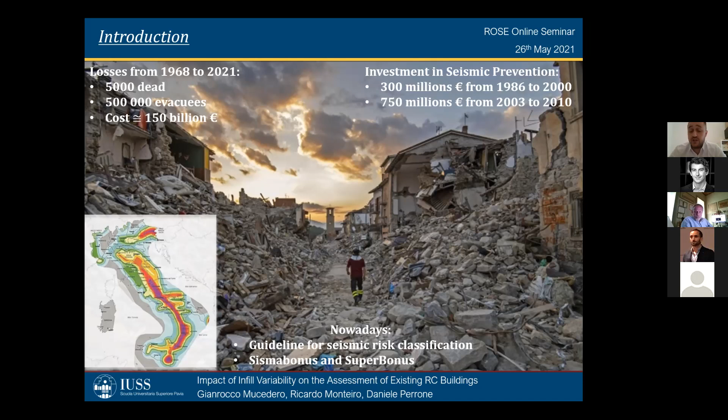I can say it is a unique opportunity to improve the seismic safety of existing Italian buildings. If we take the cost of the L'Aquila earthquake as an example, we have 10% of losses related to structural elements and 90% to non-structural elements.

If you look at the disaggregation of losses, 47% are related to infill walls and partitions, 16% to plumbing and electrical systems, 22% to windows and doors, and the remaining portion to other elements. In particular, damage to plumbing and electrical systems, but also windows and doors, is generally related to in-plane and out-of-plane damage of infill and partitions.

This means that masonry infill has a strong impact on the global and local behavior of structures, but is also important in terms of economic losses.

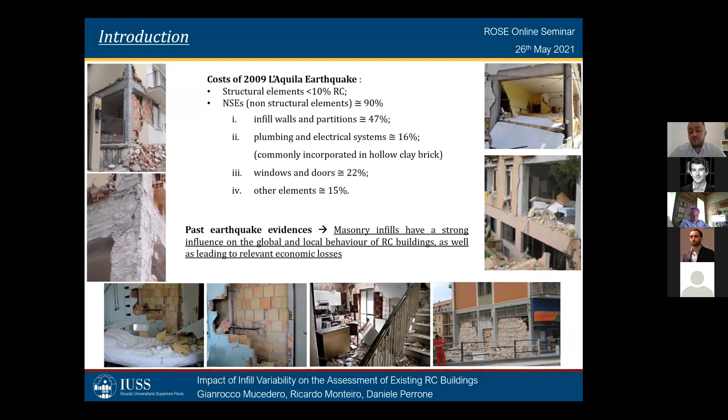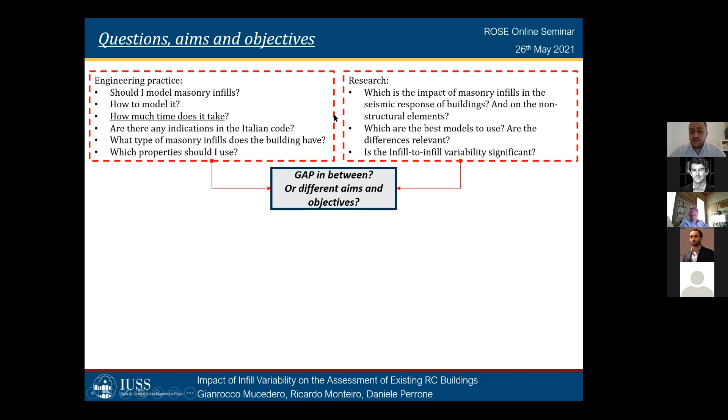When I started working on this topic, I asked myself different questions related to two directions: engineering practice and research. The questions are quite different, and the next question was whether there is a gap between them, or different aims and objectives. I think the answer is in between, and the research we are doing in this period is going in this direction.

So trying to fill this gap and support the engineer with indications on how to model the infill and which masonry infill they could expect in buildings, but also to quantify the impact of masonry infill on the assessment of existing buildings. We are going to see something related to material properties, modeling, and also a case study building portfolio.

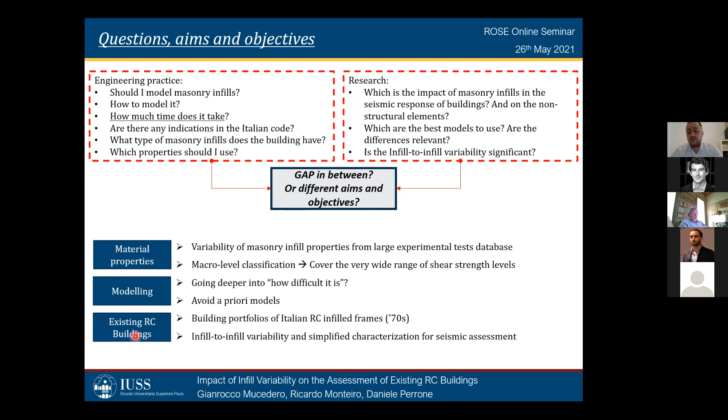So the idea is that for an engineer or a researcher, it's quite difficult to guess the correct masonry properties of an infill to be used for the assessment of existing buildings.

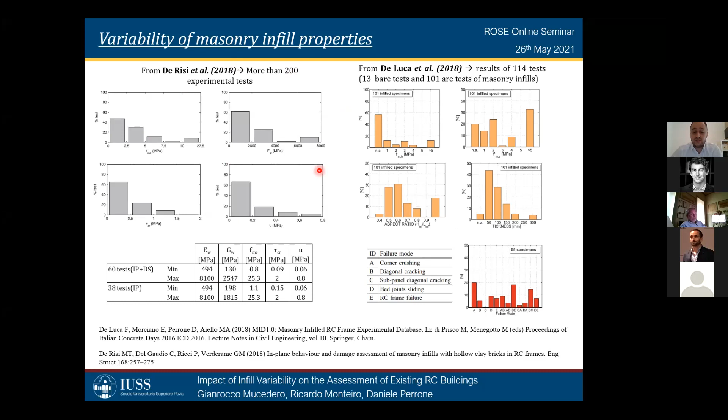So we decided to use this research methodology, and in particular to select 5 different masonry infill typologies, based on a distinction in stiffness and strength.

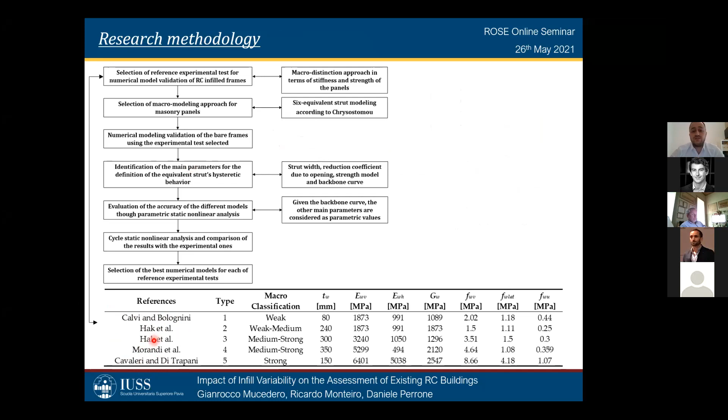Then we used a macro modeling approach for the infill frame, and we moved to a validation of the numerical model for the bare frame, and then we focused on the infill frame.

There are different parameters to define the correct hysteretic behavior of the infill, and then we were able to define, for each masonry infill, the correct models to represent that specific masonry infill.

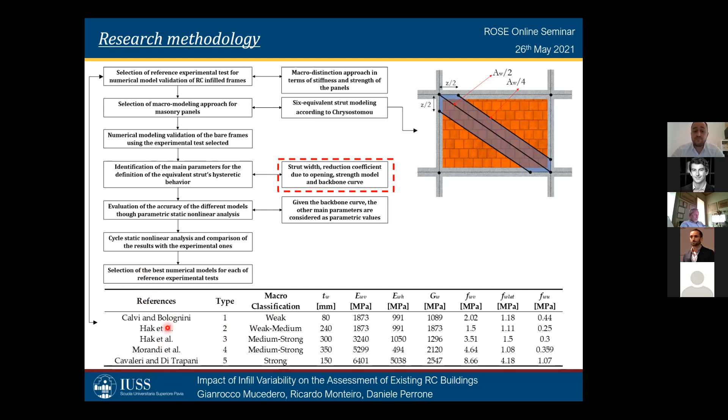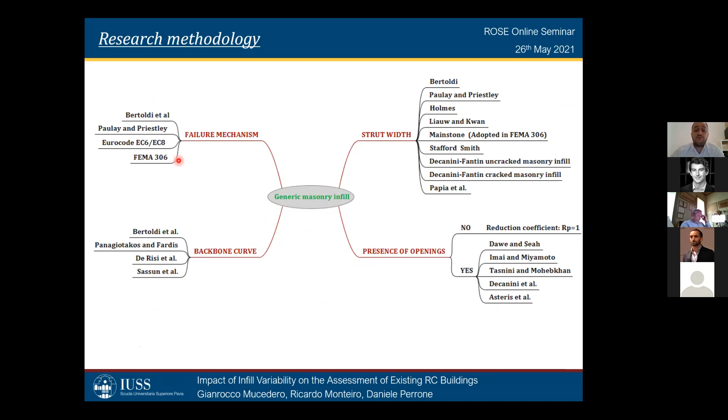So, as I said, given a masonry infill, there are different properties to be defined for the characterization of the hysteretic behavior, such as the strut width, in case of openings how to reduce the stiffness and strength, the failure mechanism, and the backbone curve.

So we start with the modeling approach of the infill frame. In particular, we decided to use a beam with hinges element, using both the flexural behavior and the shear behavior of the RC element, aggregated in one section at the end of the element.

In terms of beam column joints, we used this tube backbone curve, and the modeling approach was to use a zero-length spring coupled with a rotational hinge. This model was already validated by O'Reilly and Sullivan.

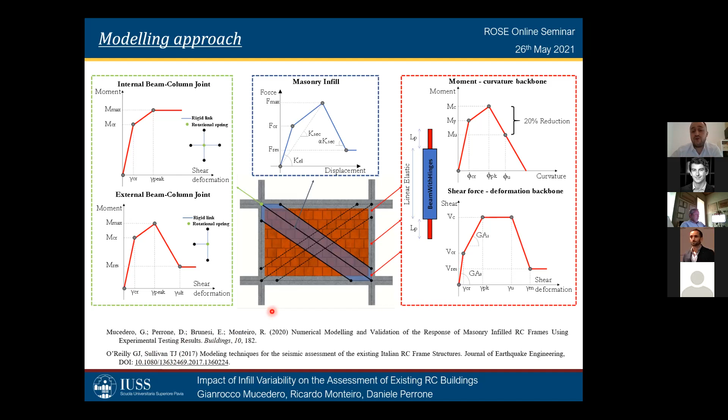But before starting the validation of the infill frame, we decided to further validate the numerical model, starting from the gravity load design - this is the test tested by Verderame et al. in 2016.

This is a gravity load design, so the frame is poorly detailed, and in particular the assumption of rigid joints gives us results overestimating the base shear of the frame.

Whereas the correct approach was to introduce a shear spring with rotational behavior, and the results are in quite good agreement with the experimental test.

Then we move to seismic load design frames. In this case, this is again a test of Verderame. On the right, there is a test of Morandi et al. in 2018.

Since both of these are designed for seismic load, the detail of the joints is quite good, and the assumption of a rigid beam column joint gives us results that are quite in good agreement with the experimental test.

So then we move to the macro modeling approaches of the infill, and in particular there are different methodologies, starting from micro modeling or macro modeling approaches. We just focus on macro modeling approaches, starting from the simplest one.

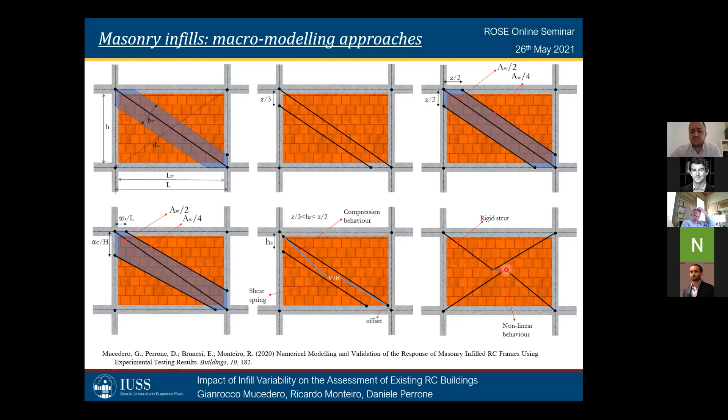One of the latest models proposed in literature is the one by Furtado, which consists of two rigid struts in each direction, connected to an element located at the center in which the nonlinear behavior is concentrated.

To define the maximum strength of the panel, it depends on the relative mechanism involved, and there are different possible failures, such as shear sliding, corner crushing, diagonal compression, and diagonal tension or cracking.

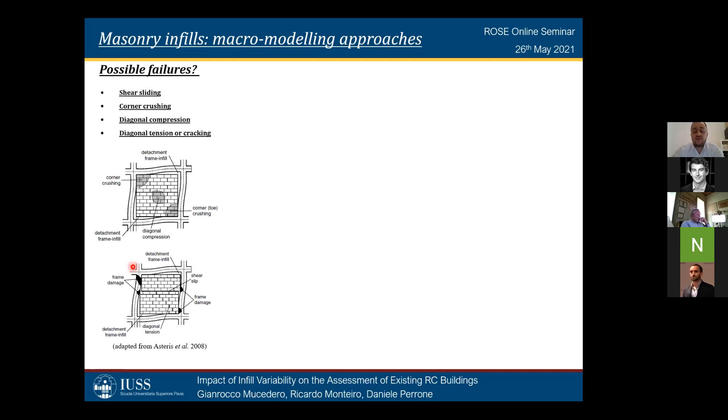I'm not going into the detail of all of these failures, but I can say that they are quite important when we go to define the models that should characterize the maximum forces in the panel.

So these are just some of all the possibilities that we can find in literature, and I can say that among all of these, only the one by Bertoldi is able to consider all of these possible failures.

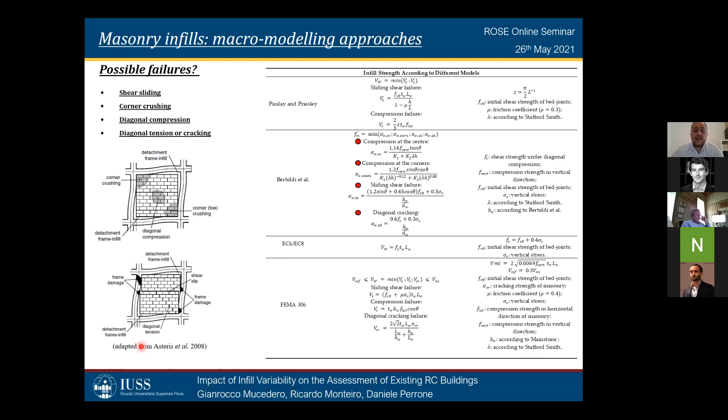Although it doesn't mean that this is the correct one for all masonry infill typology, and this is the first source of uncertainty in the model.

Then we move to define the strut width. There are different methods: those based on the lambda parameter, which defines the relative panel-to-frame stiffness, such as the one proposed by Stafford Smith and another by Mainstone, or methods based on a prefixed value or a range of the ratio between the strut width and the strut length. This is another source of uncertainty.

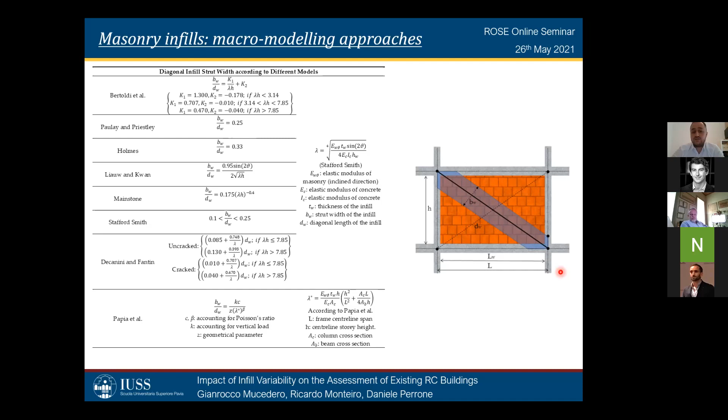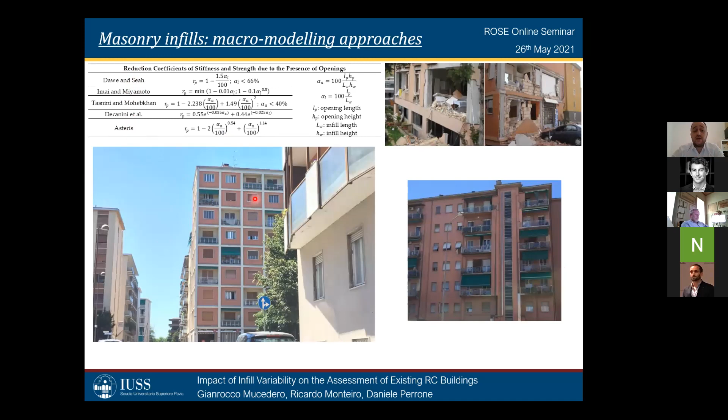Often in existing buildings we also have openings, which means we have to take them into account. Generally, we reduce stiffness and strength. There are different formulations here, and the idea is to reduce the stiffness and strength based on a percentage related to the ratio of the area of the openings to the total area of the panel.

At the end, we are able to define the strength, the backbone curve to assign to the strut. We used all of these to try to understand the reliability of the model: the one of Bertoldi, which is a quadrilinear backbone curve, where the main parameter is F max, based on the minimum of the four possible failure mechanisms of the infill; and the one of Panagiotakos and Fardis, also a quadrilinear backbone curve, where the main parameter is the cracking strength.

This backbone curve is based on 10 experimental tests on infill frames with horizontally hollow clay bricks. There are also two novel approaches: the one by De Risi, which is a modification of Panagiotakos and Fardis in terms of maximum forces — the residual is zero in this case — and also in terms of stiffness, changing the secant stiffness and the softening-to-peak stiffness. The last one was proposed by Sassun et al.

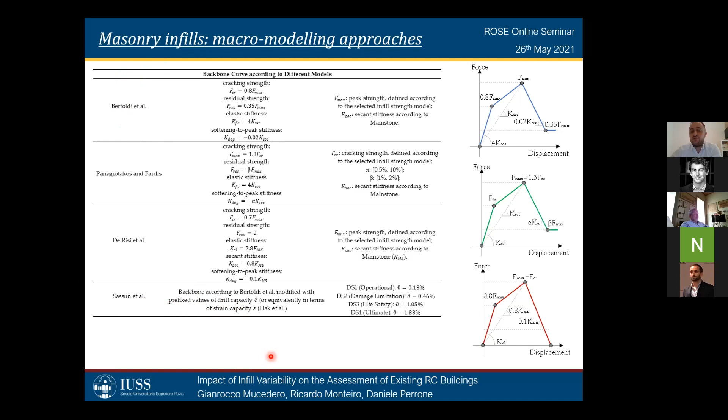In this case, the strength model is based on the approach of Bertoldi, but with a prefixed value of drift capacity for each limit state.

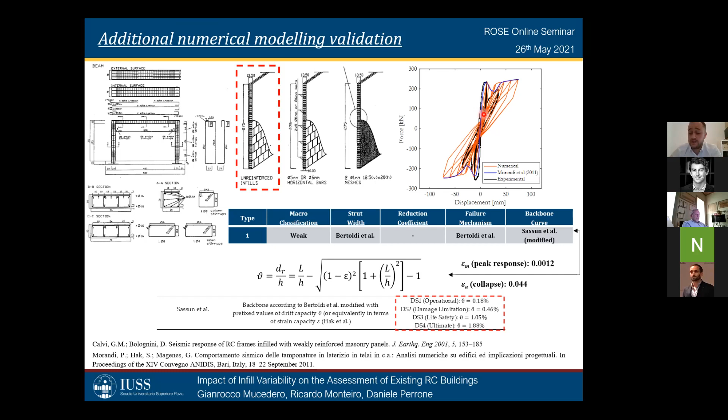Then we try to also check the reliability of the model in case of openings. The experimental test again is the one of Morandi in 2018, and the peculiarity of the test is the size of the openings. In particular, the size is equal to the size of the panel. This means that this masonry infill is completely separated into two portions, and maybe for this specific case, the best approach is to use just one strut for each portion, as also demonstrated by the damage pattern at 1% of drift.

Still, although this consideration, we decided to use the same numerical model that we use for the completely infilled frame, but accounting for the reduction coefficient. The best approach in this case was the one of Decanini that gave us results in good agreement with the experimental test, although in this case, the scatter with the experimental test is more than before for the other validation model.

So at the end, we propose a macro-level classification, which is based on stiffness and strength: weak, medium, and strong, related to the strength and stiffness of the panel. In general, these are the best numerical models that we got for each of these specific masonry infill.

Moreover, the macro-level classification covers the entire range of variability that may be detected from in-situ characterization tests. These are just examples of the backbone curve for each of these masonry infill according to the best numerical model that we got. Another idea is that from the outcomes, we noticed that the variability is not coming only from the material properties and the geometry, but also from the numerical model that we use to define the hysteretic behavior. So the idea is that we need to avoid any a priori selection of the model.

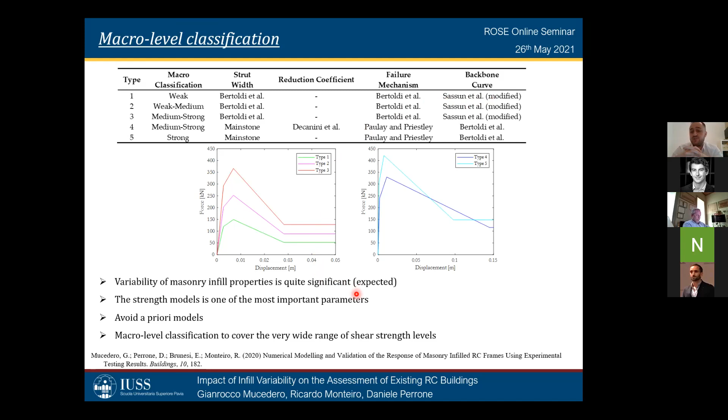Starting from this macro-level classification, we decided to quantify the impact of the infill variability on the assessment of existing buildings. To accomplish this goal, we decided to develop a fully integrated building stock, in particular accounting for the masonry infill variability. These are all the masonry infill parameters that we use to define the building stock.

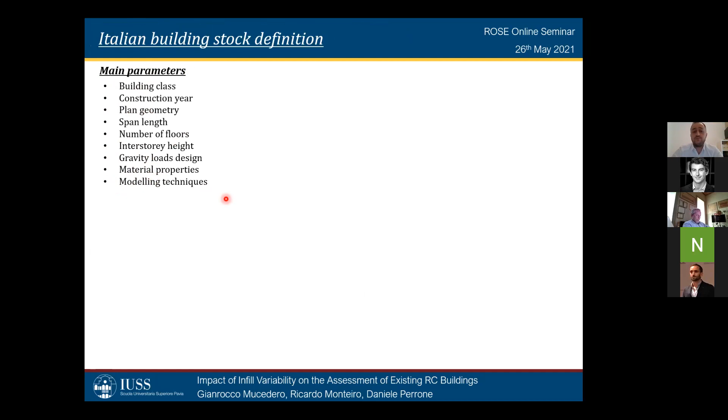According to the ISTAT database, 57% of buildings in Italy are masonry buildings, 29% are reinforced concrete buildings, and the remaining portion is characterized by other structural typologies.

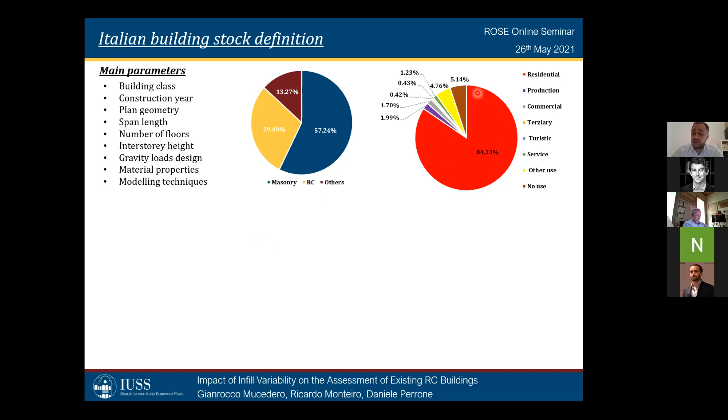85% of the buildings are residential, whereas in terms of construction year, again according to ISTAT, the massive portion of the Italian building stock was built around the 70s, and there is no particular trend for different geographical areas in Italy.

In terms of plan geometry, we used urbanistic directives and population distribution, but also checked the results using satellite images and data provided in literature.

For what concerns the number of floors, again according to ISTAT, half of the Italian building stock consists of two-story buildings, 24% are three-story buildings, 17% are one-story, and the remaining portion, buildings with 4 or more stories, is 10%.

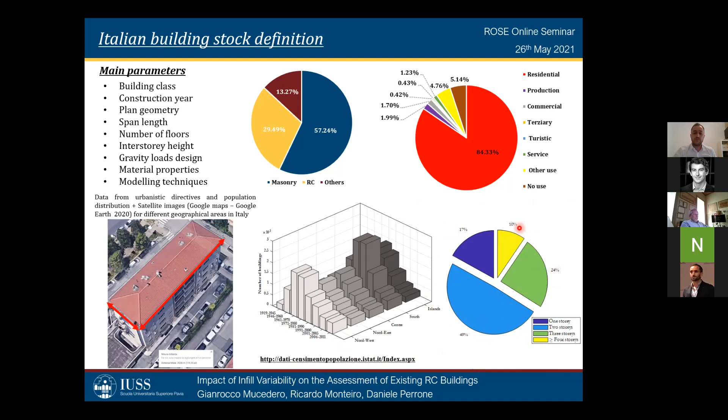This slide shows something related to the evolution of the Italian code with respect to construction age. In particular, we focus on this specific construction age, the 70s, and at that time the seismic hazard was this.

Another consideration is related to past earthquakes, in particular the one in Abruzzo in 2009. According to Libro Bianco, which is a reference for the reconstruction process in L'Aquila, the buildings classified according to the AeDES form as E, which means near collapse.

This trend tried to decrease starting from 1946 to 2001, whereas the buildings classified as B and C increased, which means that the evolution of the Italian code is working quite well.

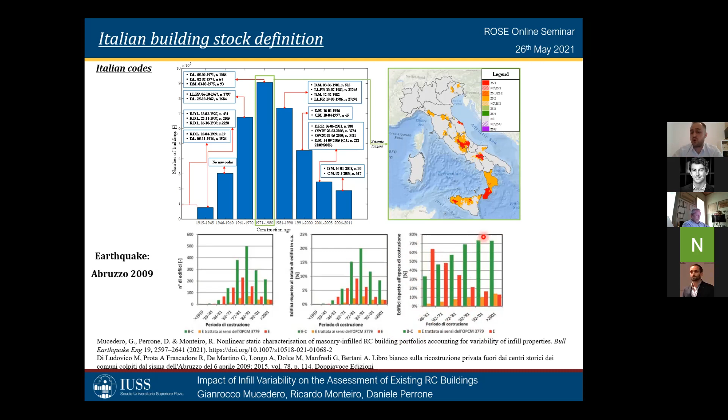For the definition of the material properties of the building stock, we used the references of Verderame and also those of Masi. In particular, for the steel, in that period of construction there were different types of steel, and we used a mean value, in particular 350 MPa for the yielding strength. For the ratio between the ultimate strength and the yielding strength, we used a value of 1.4.

For concrete, we used a value of 20 MPa according to this table. In particular, these are related to a work of Masi et al. in 2014.

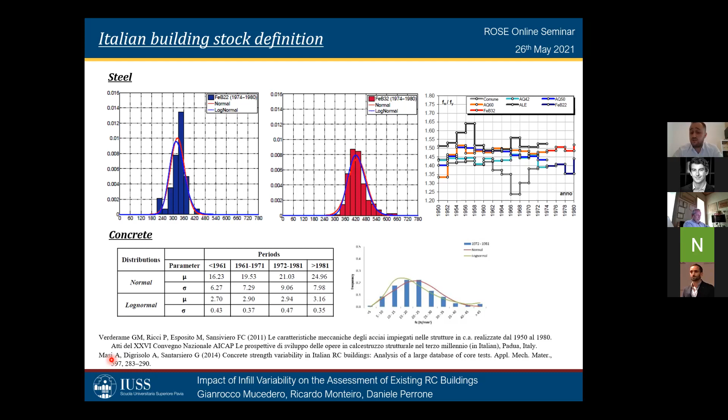They collected a very huge database of concrete strength tests in situ in Italy. Then we were able to define the entire building stock. These are all the main parameters that we used in the definition of the building stock.

In particular, in the X direction, the length of the building is from 10 to 50 meters. In the other direction, the Y, the building length is from 8 to 25. The number of floors is from 1 to 6 floor. The span length is in the order of 3 to 5 meters. And the interstory height is 3 meters.

If we select now one direction, we are able in this range from 8 to 25 to define discrete building lengths, in particular 7 according to the span length, and at the end we are able to define 18 different geometrical configurations. We define also 5 different configurations: the base frame, uniform infill frame without and with openings, and the pilotis frame without and with openings.

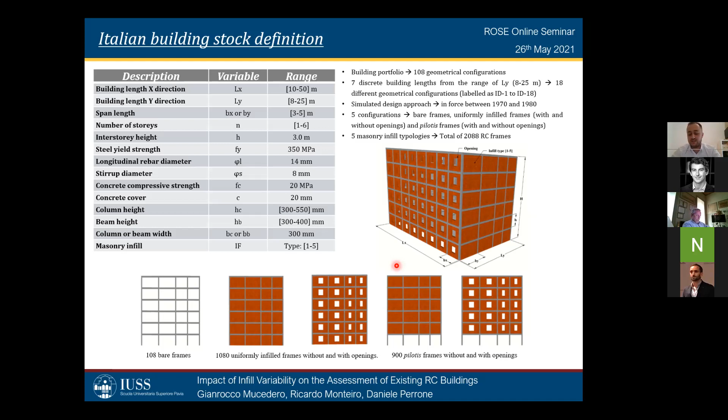So we use also the 5 masonry infill types that we select from the Macrolevel Classification, and at the end we were able to analyze 2000 reinforced concrete frames.

So this just to show you the workflow that we follow. In particular, after the definition of the material properties and the geometry, we design all of these frames according to the Italian building code enforced in the 70s, using a simulated design approach. We select 2D frames, and then we perform pushover analysis.

So now we can disaggregate all the results, in particular in terms of number of floors and in terms of structural configuration. By doing this, we can, given a masonry infill, quantify building to building variability, or given an ID, which means given a geometrical configuration of the building, quantify the infill to infill variability.

On the other end, we can aggregate all the results, which means we are grouping the masonry infill in weak, medium, and strong, and then we are able to perform a nonlinear static characterization of the entire building portfolio using a multilinearization of the pushover curves. So the modeling approach is practically the same as the validation.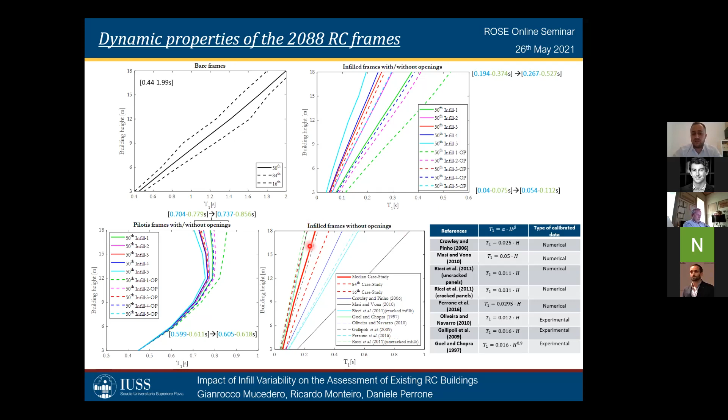Then we also checked all the results using, for the infill frame without openings, simplified equations proposed in literature. The first thing to notice is the huge variability between one formulation and another. Secondly, the best formulation was the one of Gallipoli et al. in 2009, which is quite close to the median value of the entire building portfolio. Also the equations of Goel and Chopra, Oliveira and Navarro, and Ricci are in very good agreement with the results, in particular in between the median of the case study building stock and the 16th percentile.

In terms of pushover analysis, so this slide I'm presenting: on the left the analysis for the infill frame without openings, in this case with openings. And in each of these subplots, you can see one pushover curve for each masonry infill and also the bare frame structural configuration.

These are the normalized mean capacity curves, in particular normalized because we are talking about seismic coefficient, so the base shear normalized with the total mass of the building, and mean curve because these are coming from all the analyses for the building stock for the same infill. In particular, you can notice the huge variability between one type of infill and another, going from infill type 5 to infill type 1, which means from the strongest one to the weakest one.

This variability is in the order of 60%, whereas going from 1-story buildings to 4 or more story buildings, the variation is in the order of 80%.

You can notice also that the seismic coefficient is quite reduced when we took into account the presence of openings, which means considering the reduction of the strength of the panel. Moreover, in this case the variability given one floor is quite important. The variability is in the order of 75%, whereas going from one-story building to 4 or more story buildings, the seismic coefficient decreases in the order of 85 to 90%.

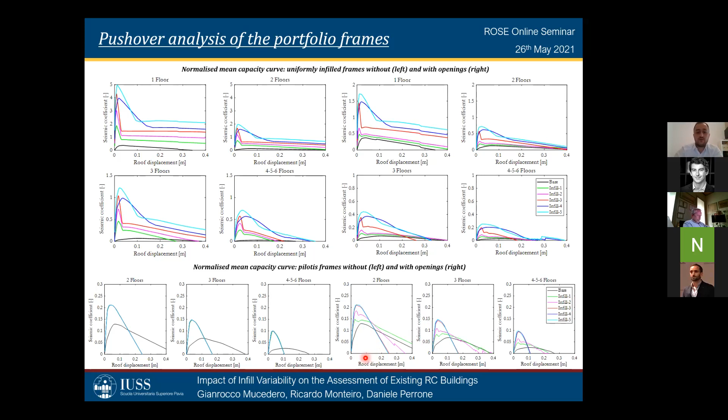Then we decided to quantify the building-to-building variability. I'm just presenting an example for the bare frame structural configuration and the infill frame with infill type 1. In particular, the variability around the mean is in the order of 13 to 16% until 3-story buildings. Then this variability is in the order of 30% for 4 or more story buildings, and this is also due to the fact that we aggregate the 4, 5, and 6 story buildings in only one plot.

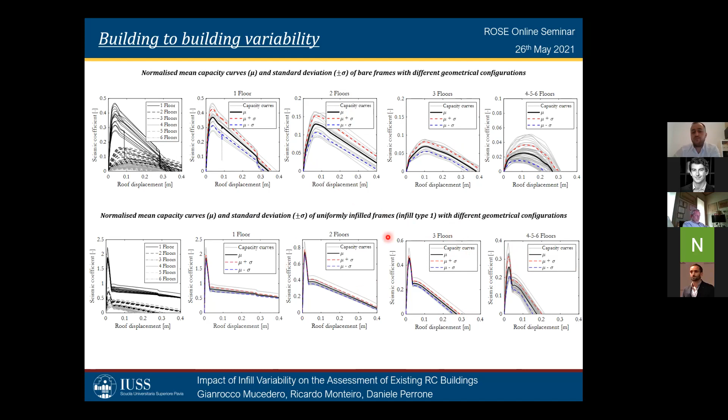So for what concerns the building-to-building variability, when we consider infill type 1, this variability is in the order of 5%, so quite reduced with respect to the previous case, until 3-story buildings. And then this variability is in the order of 17%. So the idea was that the huge variability is not coming from the building-to-building variability, but from the intra-building variability, which means infill to infill.

This is just an illustrative example of 3-story buildings in which we are changing the geometrical configuration. As you can see, going from one geometrical configuration to another, the seismic coefficient given a masonry infill is practically similar, which means that the huge variability is coming from the intra-building variability.

Then we decided to plot also the mean and the standard deviation. You can see that if we now plot all of these means and standard deviations inside one plot, the huge variability is due to the intra-building variability, whereas the variability due to building-to-building variability is quite irrelevant. This is also true for the 4-story buildings and all the others in the building stock.

This is just another example to show you the importance of the number of floors in existing buildings. Going from 2-story building to 4-story buildings, you can see how much the seismic coefficient is reduced.

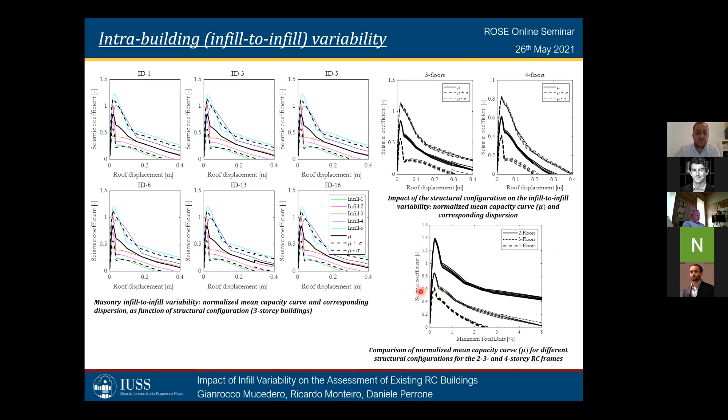At the end, we decided to do another step, which is the simplified characterization for seismic assessment. So according to Vamvatsikos and Cornell, given a pushover curve, we can fit a multilinear backbone, in particular to get from SPO to IDA, using the SPO to IDA to get the IDA curves and also the collapse fragility.

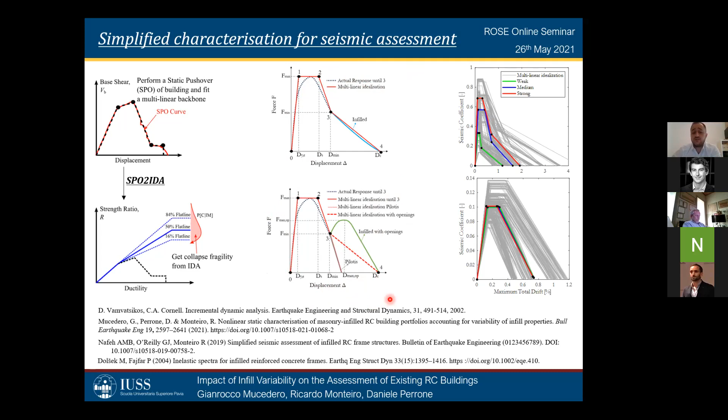For the bilinearization, we use the approach of Dolšek and Fajfar, which is based on infill frame and is practically similar to the N2 method that we use in Eurocode or in the Italian code. And we noticed that the approach worked quite well, although in case of openings we noticed some discrepancies.

Then we used this approach in the entire building portfolio. So for the infill frame without openings and with openings, you can notice that each of these plots now have only three types of infill, because we aggregate infill type 1 and 2 into weak, infill type 3 and 4 into medium, and infill type 5 into strong.

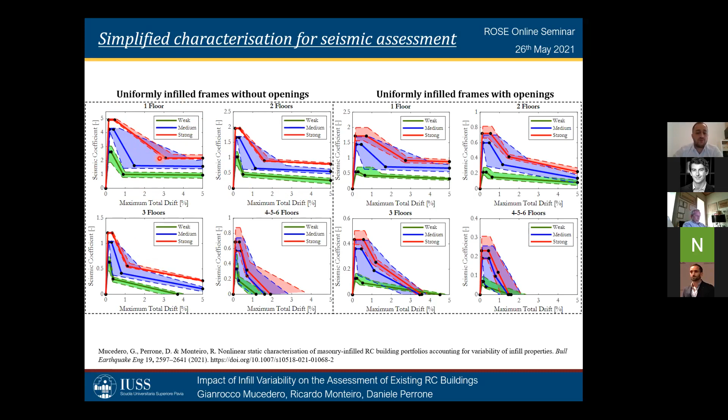Moreover, each of these curves represents the median of all the pushover curves that we performed, and the other ones are related to the 16th and 84th percentiles. So the considerations in terms of variability are quite similar to those for the pushover curves that we already saw.

We have done the same thing also for the pilotis frame without openings and with openings. As we already saw before, the variability when we consider a pilotis frame without openings, changing the type of infill, is practically zero.

Whereas when we consider a pilotis frame with openings, the variation of the seismic coefficient and the post peak branch is quite effective when we use a weak masonry infill.

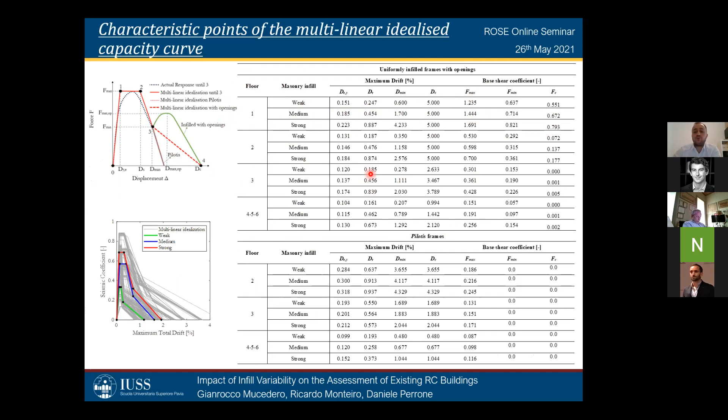So then we provide to the literature a table like this, in which the user can, according to a specific number of floors, choose the masonry infill and also all these points, which are the characteristic points of the multilinear idealized capacity curve. The next step would be also to use this information to run the SPO to IDA tool.

So in conclusion, the proposal of the macro level classification allows the engineer to use the material properties and the modeling approach for each of these that is consistent with the experimental test. The idea is to cover the entire range of variability that they could expect in existing buildings.

The variability is not only coming from the material properties and the geometry, but also from the numerical model that we select for the characterization of the hysteretic behavior. The infill to infill variability is higher with respect to the building variability.

Moreover, the idea is that we should avoid a priori selection of a numerical model for the masonry infill, but it should be selected according to a specific characterization of the masonry infill.

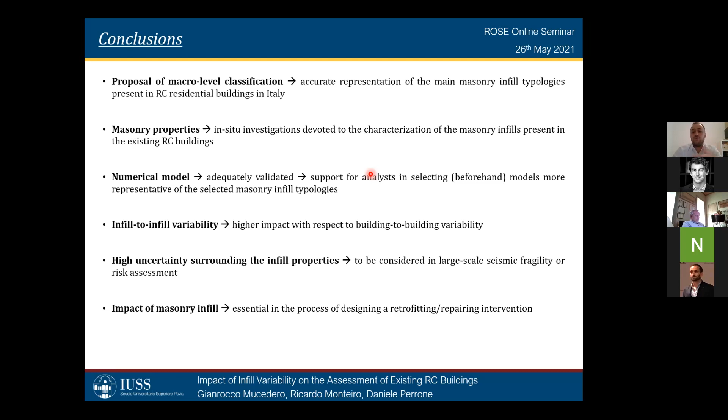Moreover, the impact of the masonry infill is quite essential when we look at the design of a retrofit or repairing intervention. Something related to the ongoing research.

So we also quantify the impact of masonry infill properties and modeling uncertainty on the seismic risk assessment of existing Italian school buildings. In particular, you can notice the variability in terms of interstory drift and peak floor acceleration, using different types of masonry infill, and also in terms of expected annual losses, using both the uniform infill frame and the case in which we account for the presence of openings.

Then we moved on to quantify the impact of masonry infill variability on the floor response spectra in RC buildings. In particular, you can notice the variability using one infill versus another and the variability due also to building variability.

But the most important thing is the variability, and we can say the difference between the infill frame and the base frame.

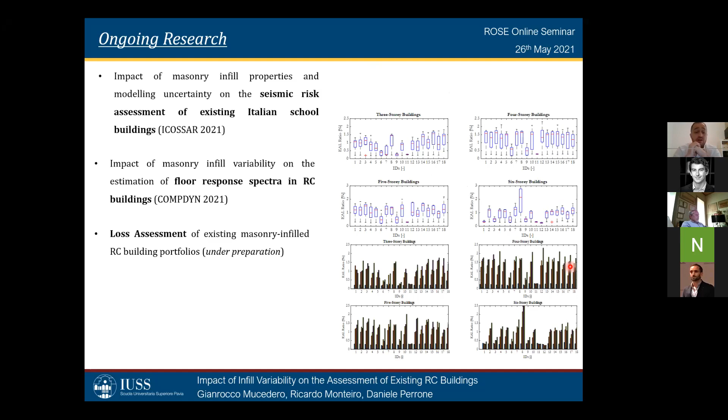And at the end, we also performed a nonlinear time history analysis of the entire building stock that we see today. And we also performed a loss assessment with the idea to quantify the impact of the masonry infill in the loss assessment of existing buildings.

So thank you very much, and feel free to ask questions.

Okay, so thank you very much, Gianrocco. Very nice presentation and a lot of information, I think. Okay, so do we have any questions or comments for Gianrocco on his presentation? I can see a lot of people clapping. Okay, so maybe I will just start with one question that I had.

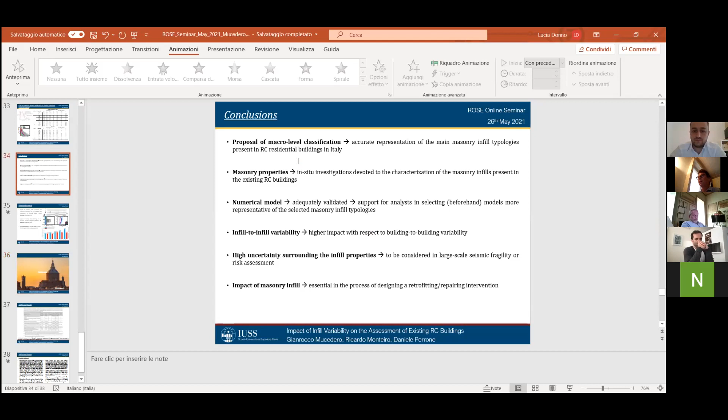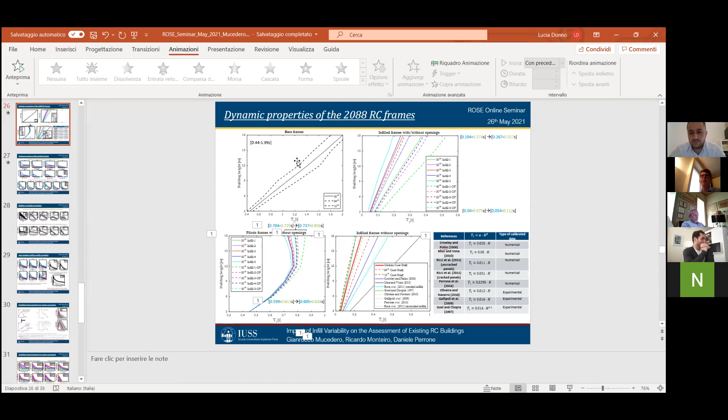It was more of a curiosity related to the consideration of the openings you had on the infill. One of the things you were mentioning in the last couple of slides was that the impact of the openings was something to consider. Could you just again explain how you were doing that and the relative impact it had on the backbone modeling, for example? I've seen some people do this in the past, but just to know in terms of modeling.

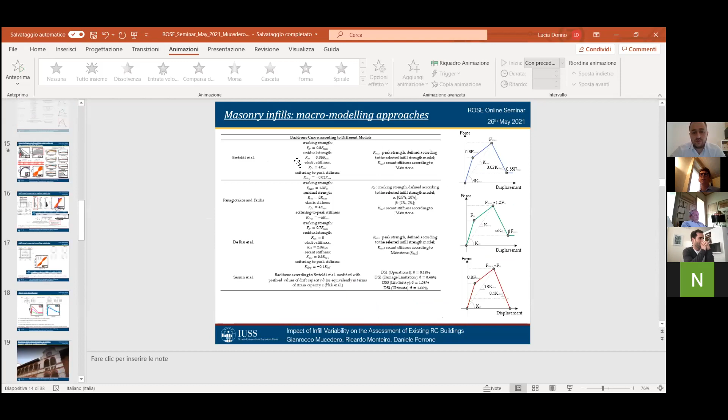Yeah, so the general consideration is that there have been different ideas of how to do that. In general, you can use different equations, and there are different opinions: the idea is that we can reduce the stiffness, we can reduce the strength, or we can reduce both stiffness and strength. In general, in the literature, there are different equations to do that, and you just reduce the strut width of the infill to take into account these aspects.

So the reduction coefficient is based just on a ratio between the area of the infill, the area of the openings, and the area of the panel. Of course, this is a simplification of reality for sure. It's in relation to the area of the openings, it's a simplification like that.

Yeah, and also it's important to say that this problem is also related to the location of the openings, the height of the openings.

If the frame is completely separated into portions, as in the case of, for example, the test of Morandi, like this, and so on.

Thanks. Do you have anybody else? I have just a quick question about the openings that Jared was discussing. Which one of the expressions was most compliant with the experiments that you compared with?

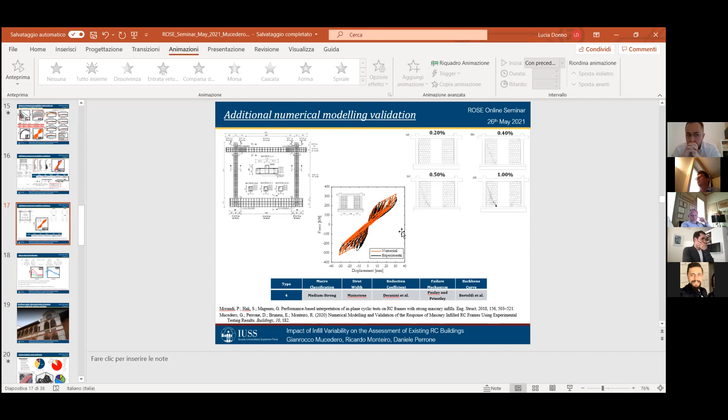Thanks, Karim, for your question. The best formulation was the one of Decanini et al. Although I can say that all the equations you can see here are in quite good agreement with the experimental test that we used. I think the best one for our test was Decanini, but also the one of Dawe and Seah is quite good.

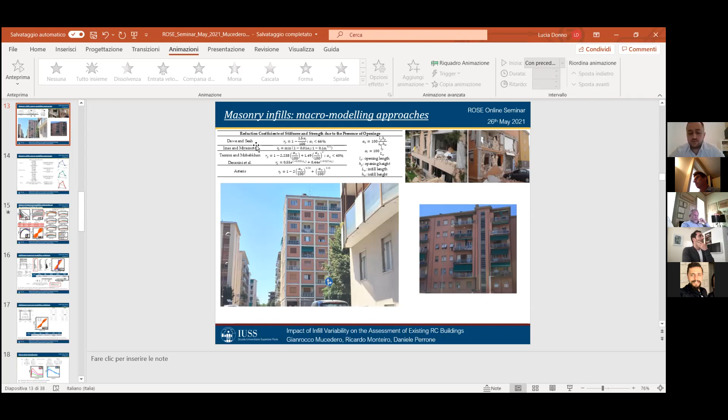Okay, thank you. You're welcome. Thanks, Karim. Anybody else have any question or comments? No, I don't hear anything. I had one other question, about the modeling you were doing.

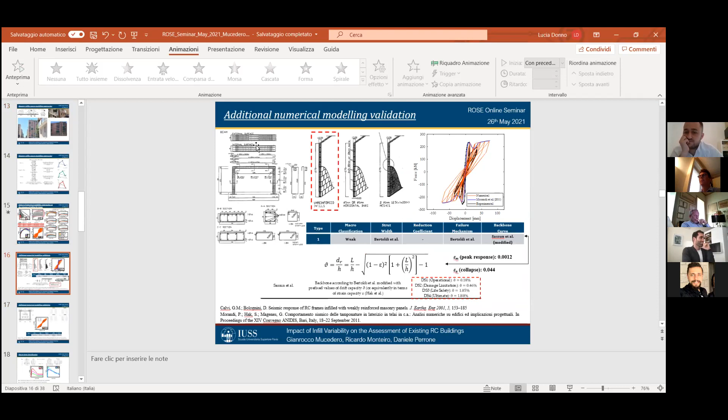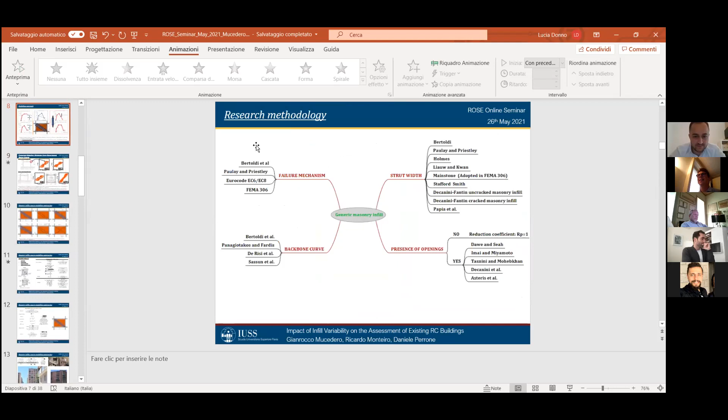Yes, I see Volkan has a question, but I'll finish now. About the modeling you were doing, it was around here, I think it was maybe 2 slides more, where you're comparing with the experimental testing. So in the top figure, the top comparison you were making with the gravity load design frame, what was the difference in the modeling between the graph on the left and on the right? So the shear hinge, right?

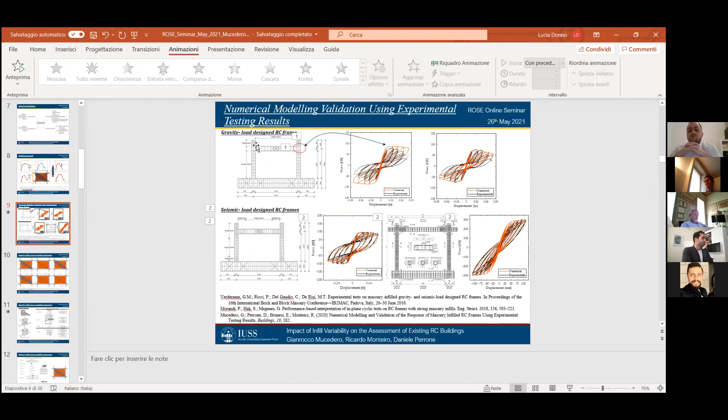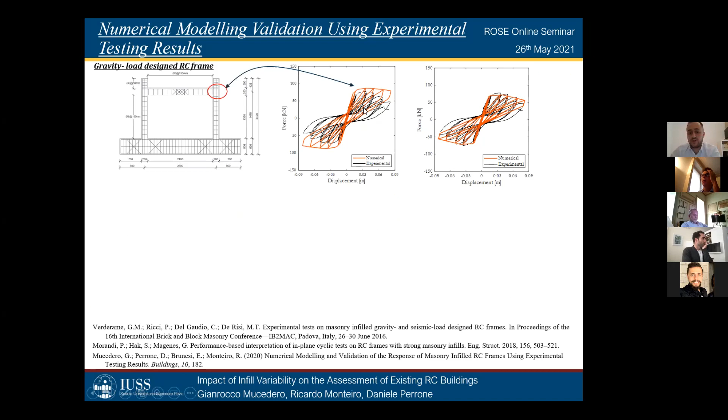Yeah, maybe. So the difference is that in this specific case, we used a rigid link to model the beam-column joint, so the joint is completely rigid behavior. Whereas in this case, the idea was to use a backbone curve, the one that you can see here. Since the joint is poorly detailed, the assumption of a backbone calibrated on experimental test is better than a rigid beam column joint. Whereas in this specific case, the assumption of rigid joint, since it's designed for seismic load, is in good agreement with the experimental test.

Okay, I wasn't sure if, when you mentioned shear hinge, you were mentioning the shear hinge of the actual joint or the shear flexibility of the frame members. But okay, yeah, that makes perfect sense. We had a question from Volkan.

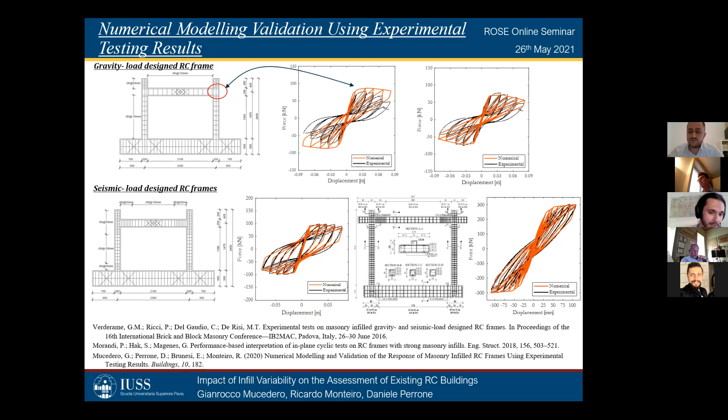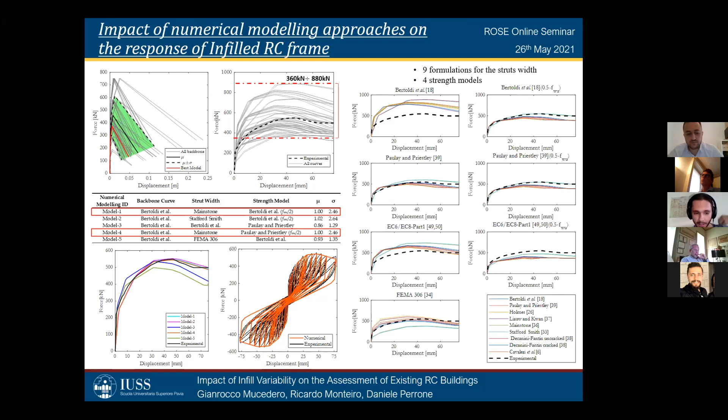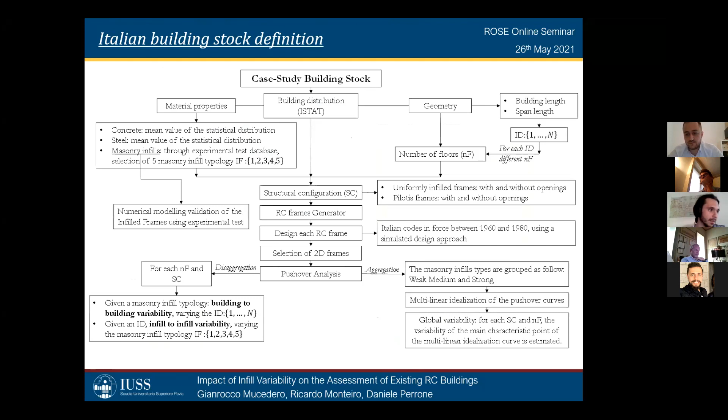Yeah, hello, extensive work, congratulations Gianrocco. I just want to ask something that came to my mind recently. When you showed the losses, I was checking - have you tried to classify the results in terms of risk classification, such as the ones presented in Sismabonus? I'm really curious if this kind of variability puts the structure from one risk class to the other one or not. That's something I'm curious about.

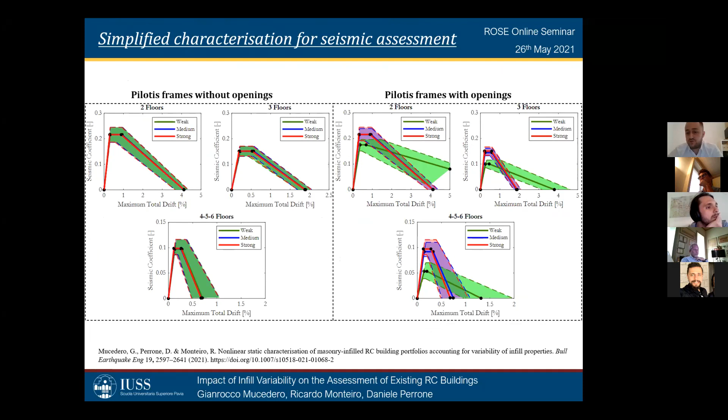Thanks Volkan for your question. This is something we are going to do in this period, to focus more attention on loss assessment due to masonry infill. We also check these results with PACT - we use both PACT and story loss function to do loss assessment. But I can say that with respect to Sismabonus, for sure you are going to get in general losses that are less than Sismabonus.

For example, if you get 1% of expected annual losses in a numerical model, for sure with the approach of Sismabonus, you are going to get 2%, 3%. So for this reason, there are different results from Sismabonus and the calculation that we can do with the loss assessment in research.

In terms of difference between one infill typology and another, for sure there is a strong variation, as you can see from here. But at the moment, you can say, for example, type 1, type 2, type 4, type 5, you can have an increase of the losses due to the strength of the infill, and this is due to the acceleration sensitive components. You are seeing an increase of the peak floor acceleration due to the strongest masonry infill. But at the moment we have not checked these results with the Sismabonus one.